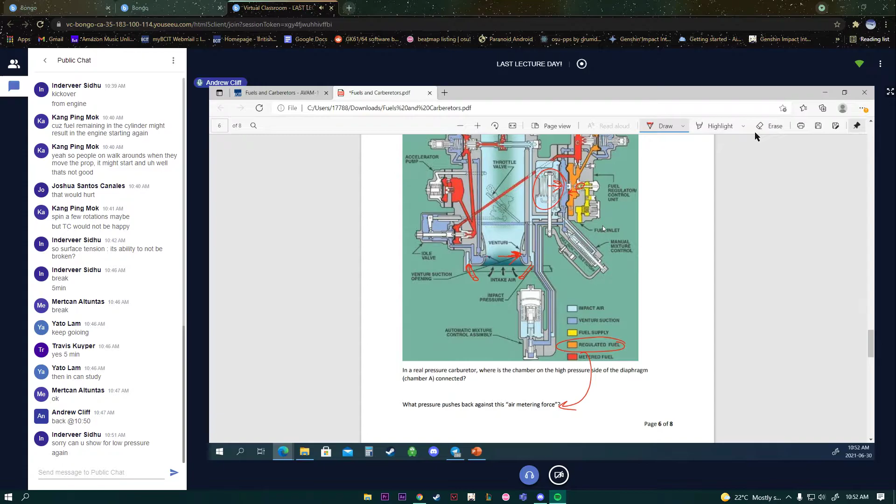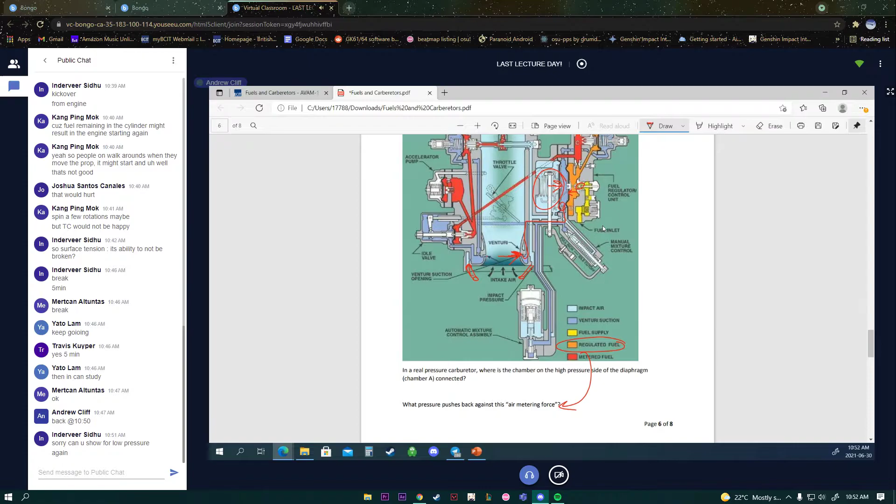Low pressure in through the venturi. In through the venturi, it makes its way to chamber B. Impact air makes its way to chamber A.

You good, Andy? I'm lost. I don't know where we are. We just started reviewing pressure carbs.

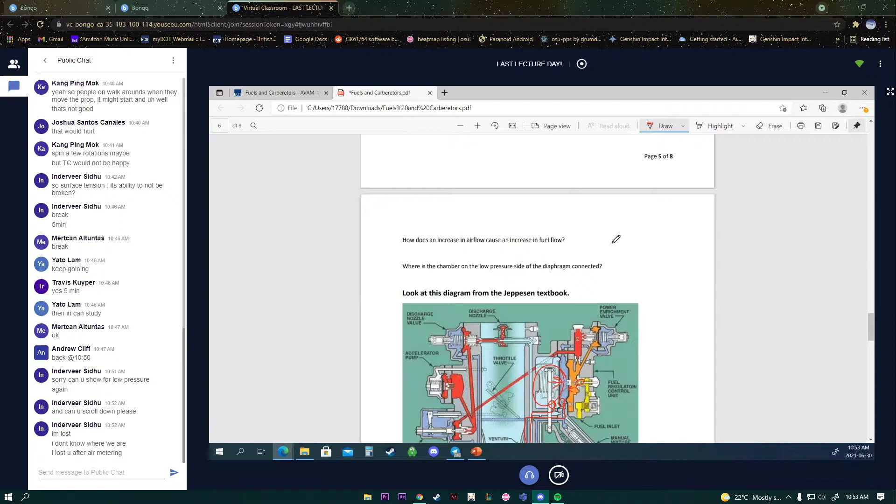Lost you after air metering. Okay, we'll back up a bit.

So we'll go back to this one. How does an increase in airflow cause an increase in fuel flow? Well, that's the difference of negative venturi pressure and positive impact pressure. Negative in there, positive in there. That makes this whole unit want to move to the left. No, sorry, to the right. Which opens that valve. Remember, that valve sits in an area like this, and it kind of looks like this. Okay, so as we move this way, it's unseating, increasing the gap between the valve and the seat, letting more fuel into the system. More difference of air pressure, more fuel.

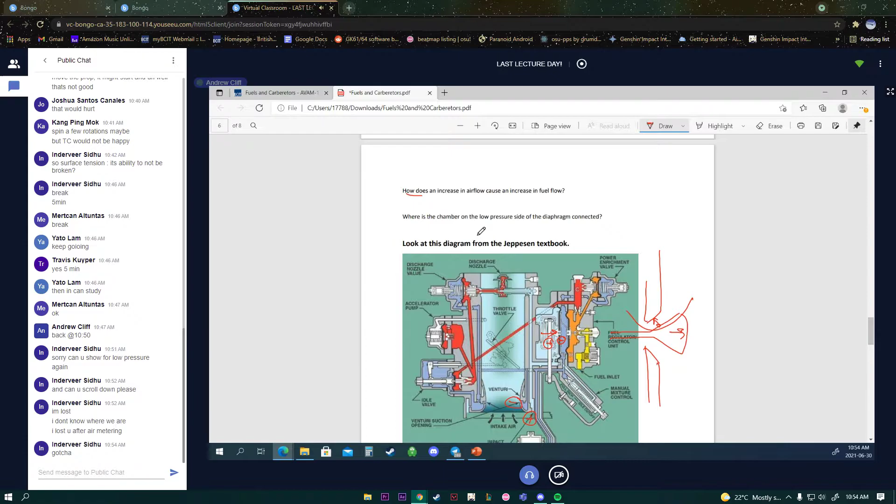Okay, is there a float chamber anywhere on the pressure carburetor now? How does this help an aerobatic flight? Well, it doesn't have any effect because we don't have to worry about it.

Okay, what happens if we turn our float chamber upside down on a float carburetor, right? Let's turn everything upside down here. We got fuel supposed to be coming in there, but now our float from gravity is keeping this closed. Also, now our fuel's upside down here. Okay, some might just pour out too much, or maybe not enough if the fuel's in the wrong spot. So it'd be very inconsistent if we're upside down or doing abrupt maneuvers. Okay, maybe the fluid's in like this if we're making a hard G-force bank. Okay, what's going to happen there? Now we have no fuel coming out. Our engine's going to die. So float type carburetor is not good for aerobatics.

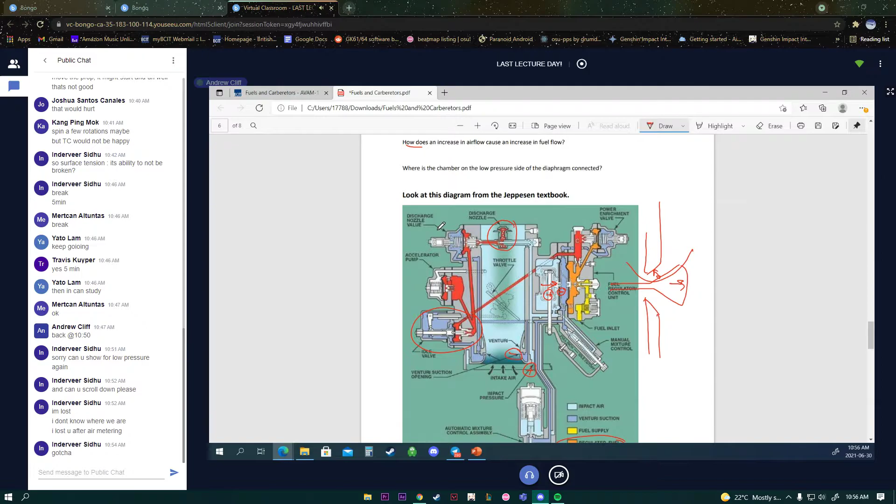How's idle speed adjusted? Idle stop screw. Just like the other systems.

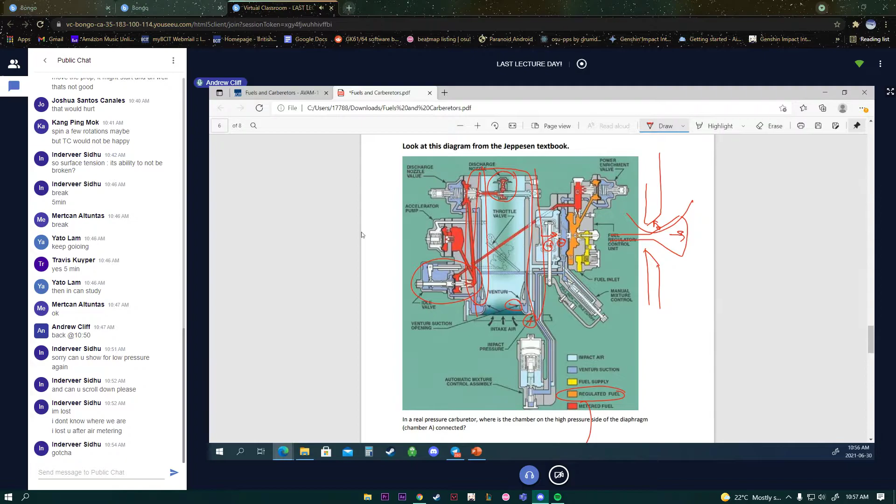Locate the throttle body. Okay. This whole thing is the throttle body. Right, that whole housing. Right, so all this gray, this whole thing is called the throttle body. It's a body that houses the throttle.

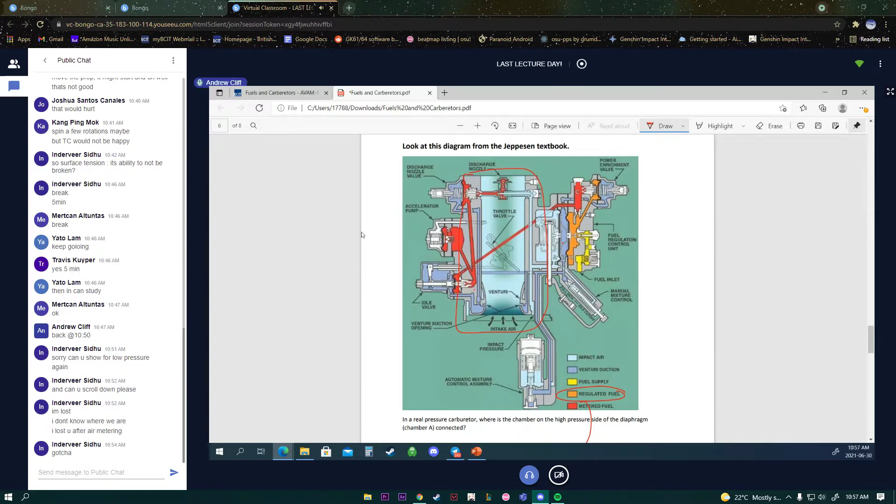What atmospheric changes do aneroid bellows respond to? Pressure and temperature, right? How would a change in temperature affect the fuel-air mixture? Well, the hotter things get, the less dense they are, the less dense the air pressure is. The higher we go in the atmosphere, it's less dense, but if we make it cool, it's going to become more dense.

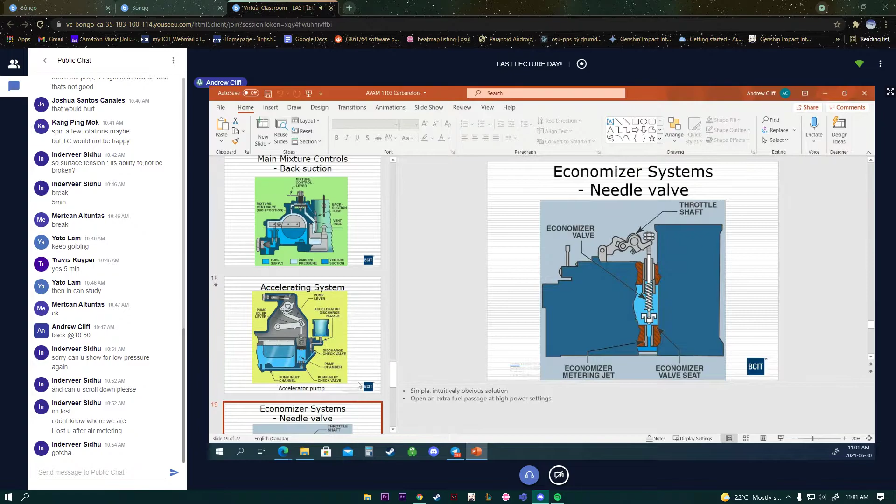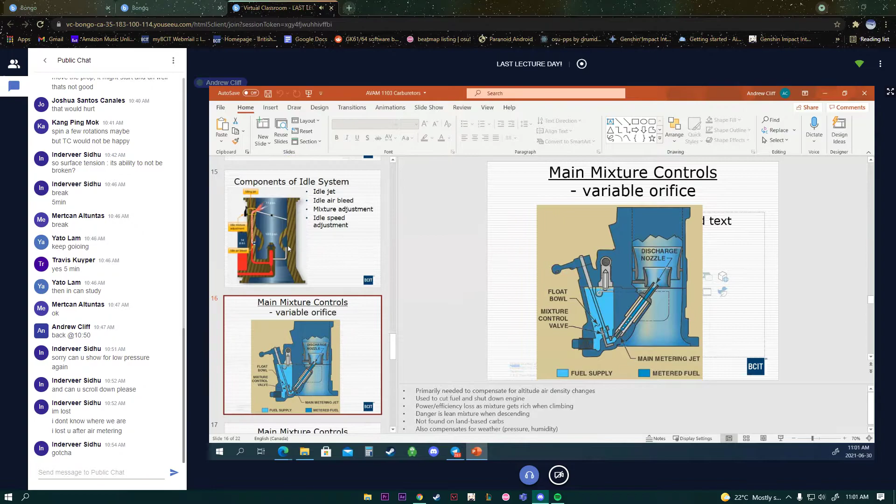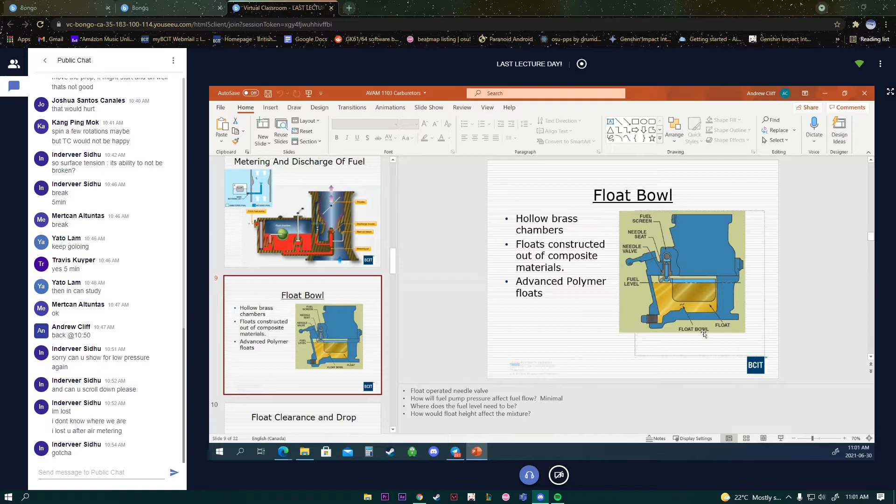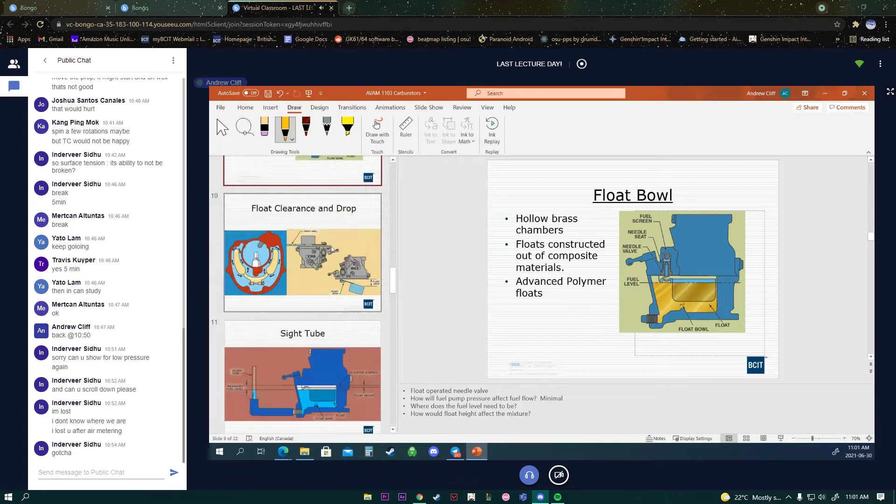Where's the needle seat? And what actuates it? The floats actuate it. The needle and seat. Where is it here? Here it is there, the needle and seat connected to our floats. Not shown in this one. There's a good picture. That adjustment tang is right in there. Wrong color. The adjustment tang's right in there.

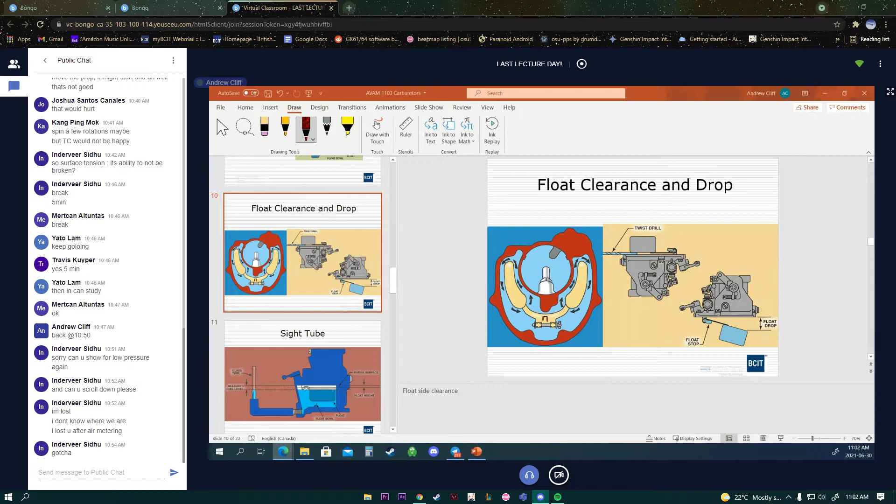What would happen to the fuel level in the float bowl if the float were to sink? If this float sinks, it's going to bring this needle valve down. Fuel's going to come pouring in here, and since the float's not doing its job, the fuel level is going to keep going up to the very top of the carburetor. Where can it go? Well, we got the main nozzle in there somewhere. It's going to eventually just pour out of there until we have no more fuel left in our fuel tanks.

Float sinking isn't even a problem nowadays because we use advanced polymer design. So even if you drill a hole in it, it'll still float.

If the float is in good condition and adjusted properly, what will happen to the float and fuel level in the float bowl as engine power increases? We're going to have a bigger demand for fuel, so the floats are going to drop a little bit and let more fuel in. The float, needle, seat, and valve always maintain a specific height, no matter what our engine demand is.

What is volatility and how is it measured? Volatility is a fuel's characteristic to evaporate. And how's it measured? Reid vapor pressure.

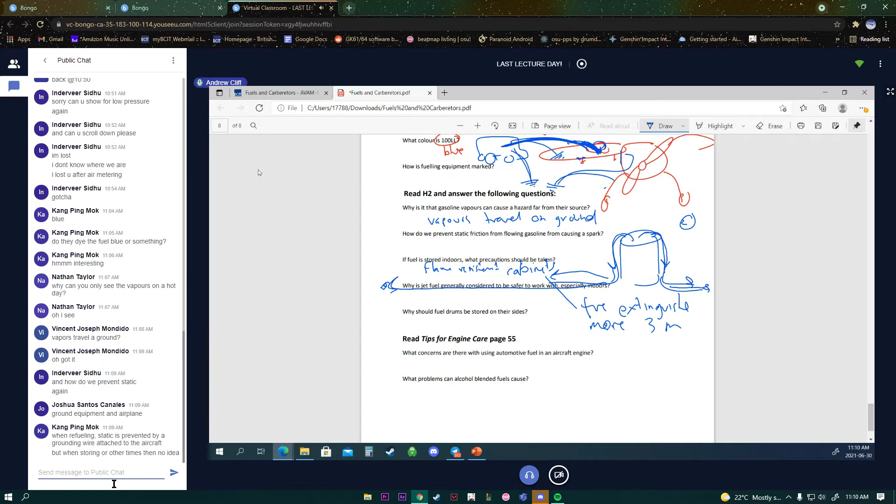How do we prevent static again? Grounding equipment and airplane. When refueling, static is prevented by a ground wire attached to the aircraft. But when storing, if it's stored, it's not moving around, so static electricity isn't going to build up. If we're storing barrels, we want to store them on their side, with the bungs level with the ground. If we look at the top of a big fuel barrel, it has a lip on the edge, and we've got the bungs there—a big bung and a small bung—that fit in the bung holes. We can get rain or water in there, and if our seal's not so great on our bungs, we can get water getting mixed into the fuel, which is no good.

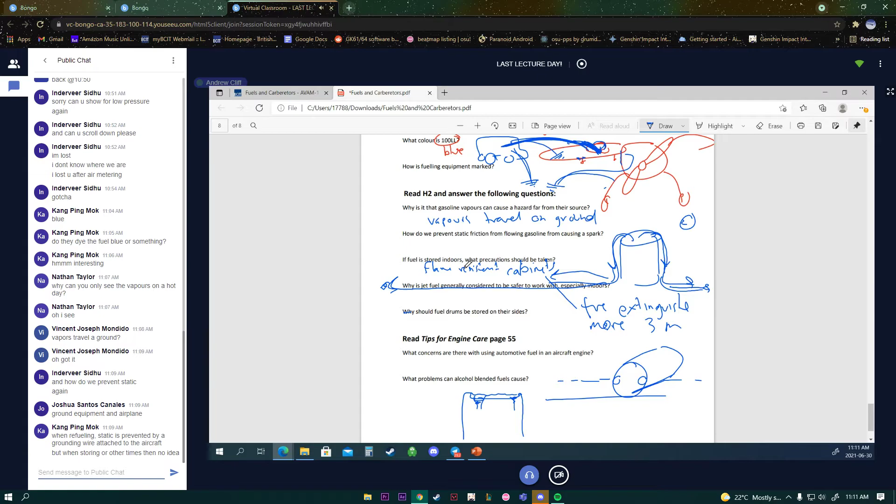That's the next question: what concerns are there using automotive fuel? It's more susceptible to vapor lock, right? They have a lower, or is it a higher, Reid vapor pressure?

Why does it do that?

Automotive fuel is more susceptible to vapor lock. It's not designed to go high in the atmosphere. Avgas is.

What problems do alcohol blended fuels cause? Blended is the key word here. We mix alcohol in there to boost our octane rating, but if they separate, alcohol is hygroscopic, which means it attracts water. Water wants to get in and mix with the alcohol. When they separate, our octane level is going to drop. Hygroscopic means the alcohol attracts the water, sticks to it, and takes the alcohol out of the blend, effectively lowering our octane rating. And if we have too low an octane rating, we're going to be more susceptible to detonation. When we have that alcohol-water mixture, it also creates acids in there, which can cause corrosion.

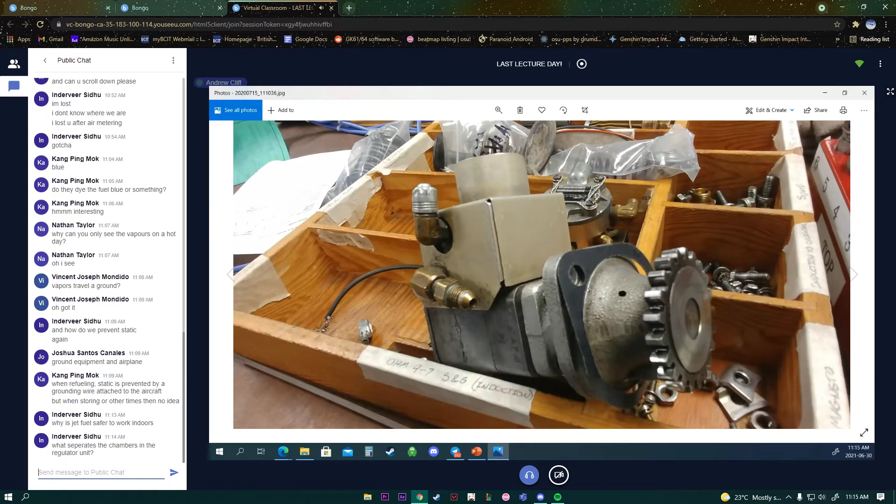The pump. That's all I got for that. No, I don't have a picture of a diaphragm.

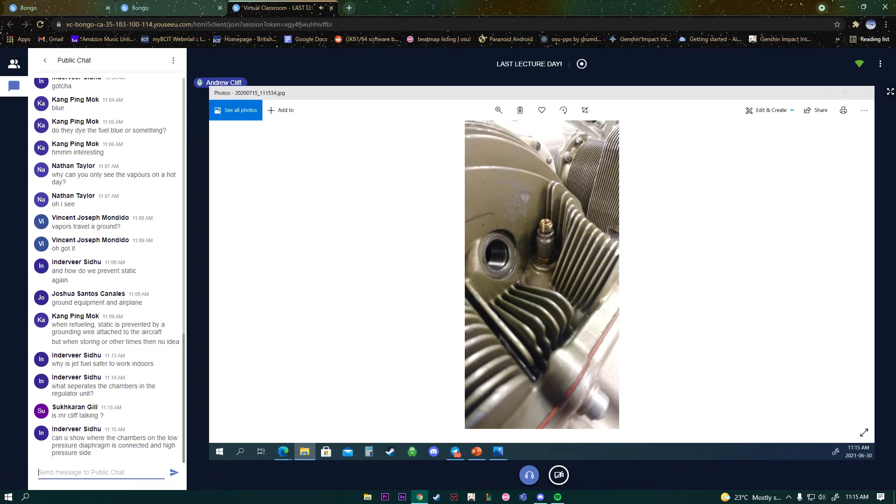Can you show me the chambers on the low pressure diaphragm is connected, and the high pressure side?

Can you hear me? Hello, check, check, 1 2 1 2. Suk, can you hear me? Can't hear me, turn your volume up. Did you try unplugging and then replugging it in?

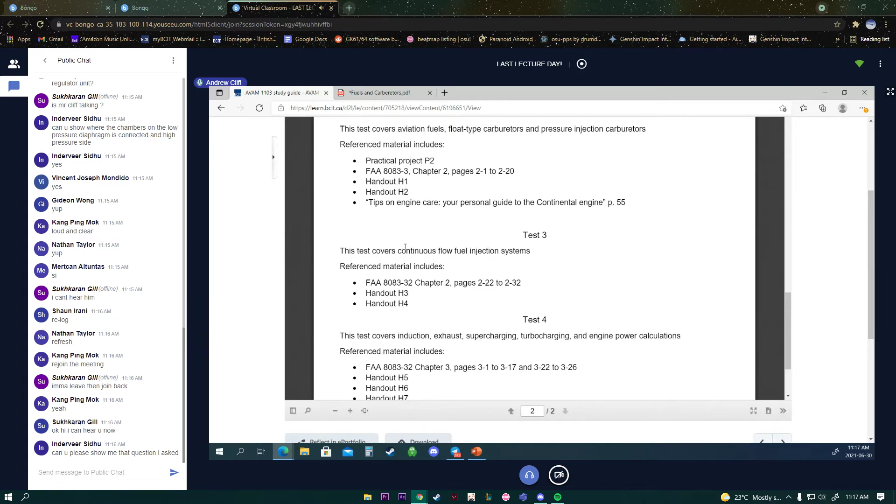We are doing P2, right? So we're talking about fuels, float type, and pressure carburetors.

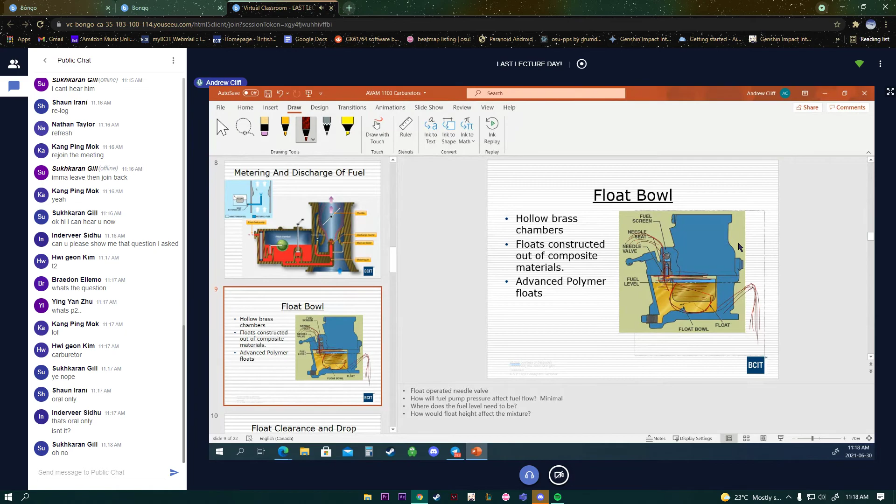Right about here, we turned it upside down. We put the twist drill in there to set the proper float height. The twist drill is just used as a convenient dimension that's requested. We're adjusting that little metal tang to adjust the float height.

When we're done, we're doing things like this. We take the drain plug out, attach a sight tube, put some test fluid in there to simulate fuel, to see that a certain height is reached and maintained. If our needle valve and seat is leaking, this tube would fill up and overflow, and we could see very easily.

Yeah Andy, P2 is oral only at this point.